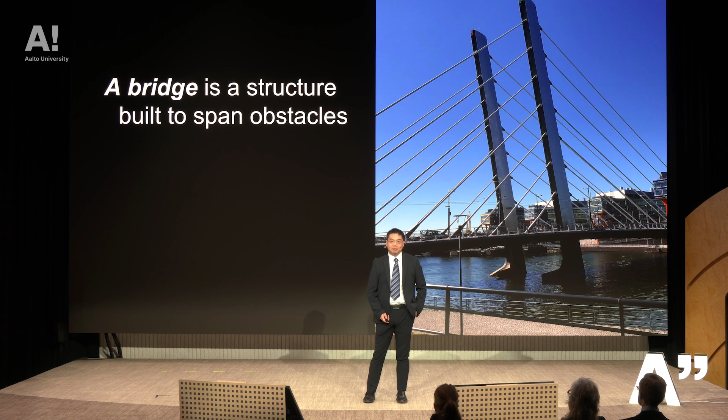But have you ever wondered how many bridges we have here in Finland? In Finland, there are about 15,000 road bridges and more than 2,000 railway bridges. Then what about their service life? Or how many years do we expect them to last? Quite long, actually. Most of them are designed to last for 100 years. Then, how old are they now? Or how long have they already been in service?

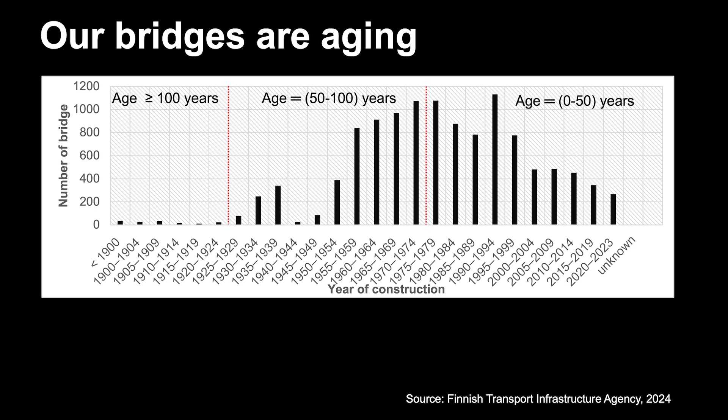This figure shows the distribution of the number of bridges by their year of completion. As you can see, most of these bridges were built after World War II, but over time, the construction of new bridges has slowed down, while the existing ones continue to age.

Now, what about their condition? According to the Finnish Transport Infrastructure Agency, about 5% of road bridges are in poor condition, and the number of such bridges is still slowly increasing. It was also estimated that by 2020, about 7,000 bridges would need renovation.

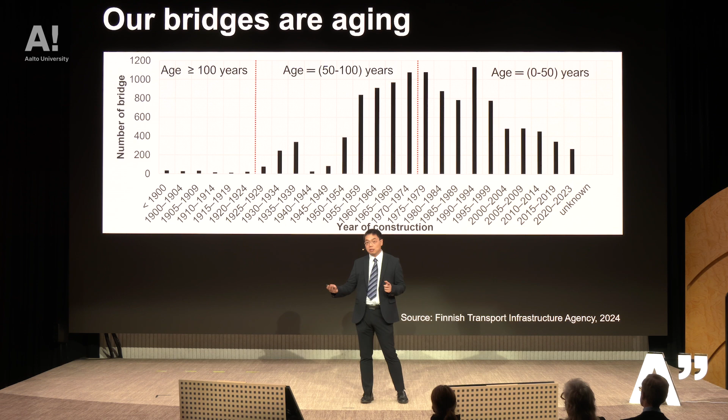So the big question is, what will happen in the next 20 or 30 years? If we look at the current trend, it becomes clear that after another 20 or 30 years, most of the Finnish bridges will be over 50 years old, and some of them will be even over 100 years old. So simply put, our bridges are aging. Actually, this is not just a problem in Finland. It is happening in many other countries as well. So to some extent, it is a global issue.

With this background in mind, let's now turn our attention to future challenges and opportunities in bridge engineering. First, how can we improve the management and maintenance of existing bridge structures? Especially, how can we develop better methods for fast bridge damage detection and also for bridge health assessment? Another question is, how can we improve the bridge robustness for both existing and new bridge structures?

And what about sustainability? As we move toward a greener future, how can bridge engineering contribute to the green transition? While these challenges are ahead of us, they also present many opportunities to find solutions. In my group, we are working on several key research topics, such as structural health monitoring, bridge robustness, and demountable connections.

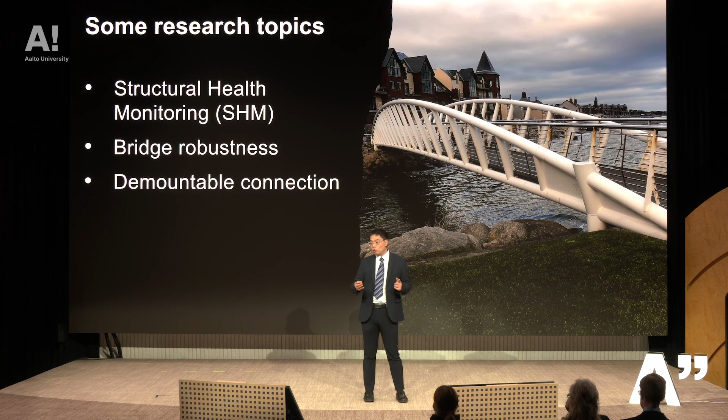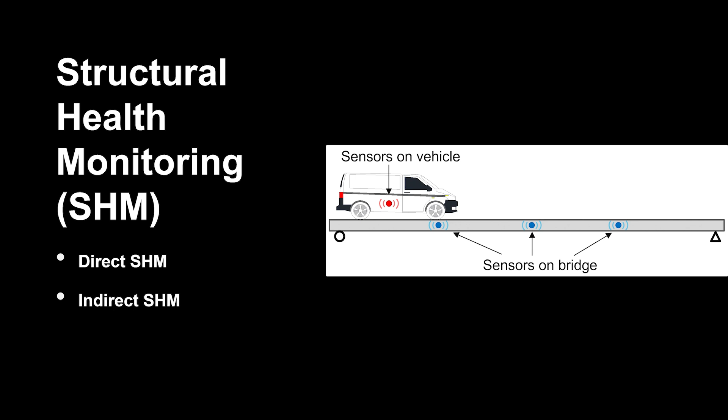Now let's start with the first topic, structural health monitoring. Bridges are designed with a long service life, but over time, bridges or bridge components can experience degradation or damage. While regular inspections are crucial, they may not always detect damage in time. And this is where structural health monitoring systems come into play. These systems can help us to detect the damage at an early stage, allowing us to prepare the repairs more efficiently and avoid costly failures.

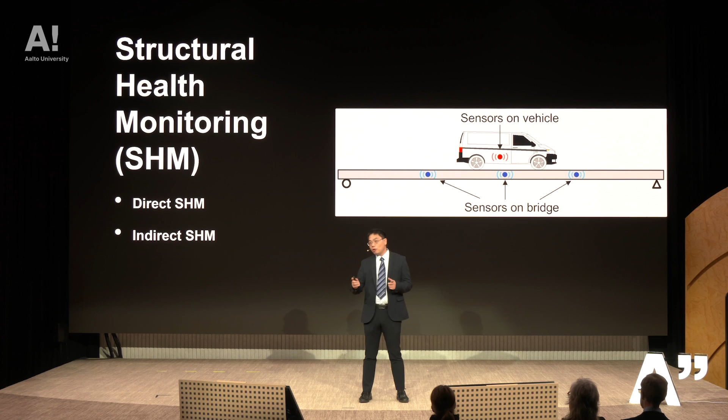Currently, most structural health monitoring systems use the direct method, where sensors are installed directly on bridges. These sensors provide us valuable information and data about the bridge's condition, but since one bridge may require many sensors, this method can be expensive and also time-consuming. As a result, these systems are typically used only for important or long-span bridges, but for short-span or medium-span bridges, structural health monitoring systems are often not implemented.

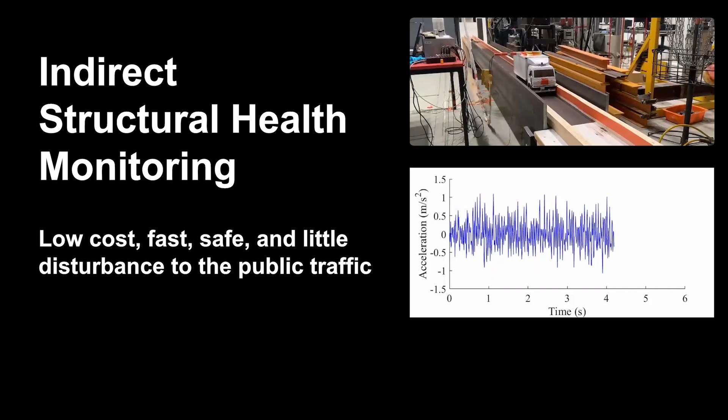To address these challenges, my group is working on developing a vehicle-based bridge damage detection method. In this approach, instead of installing sensors directly on the bridge, we install them on the vehicle. This allows us to collect data indirectly as the vehicles travel across the bridges. Since the same sensors on one vehicle can be used to scan multiple bridges, this method can be cheaper, faster, and safer. It also reduces the traffic disruptions as there is no need to stop or slow down the traffic.

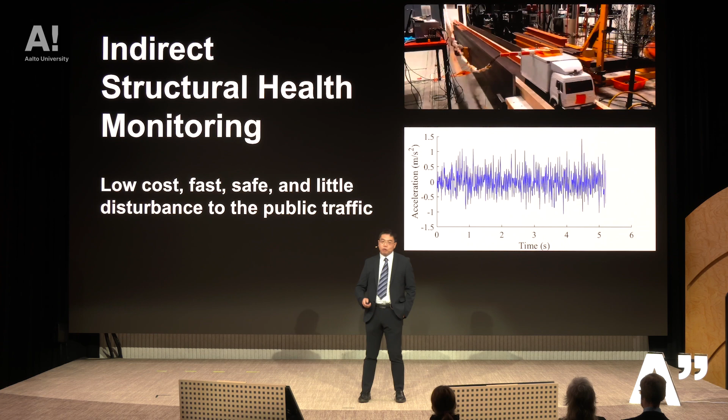In my group, we have performed some lab tests, such as shown here. And also, we have conducted some field tests on 2 temporary bridges in Espoo to further investigate this method. Using the algorithms developed in my group, we can identify the key information of the bridges. For example, their natural frequency, a key indicator of the bridge condition.

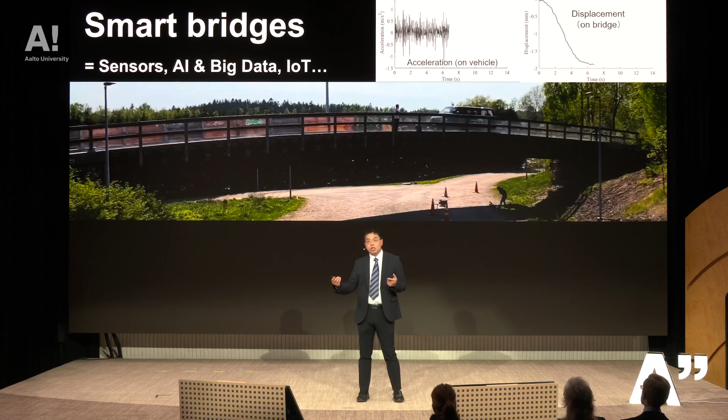While collecting data indirectly offers many benefits, it also presents challenges, for example, in data processing. However, the use of AI and big data showed a great potential in addressing those challenges. Also, my group is collaborating with our partners to explore the possibility of using public transportation, such as buses, to monitor the bridge conditions.

Next, let's talk about bridge robustness. Structural health monitoring systems can help us to detect the damage at the early stage. But beyond that, we also need our bridge to be able to avoid disproportionate consequences in relation to its initial damage. So what does this mean? For example, what will happen if a bridge component fails? Will it lead to the partial or even global collapse of the whole bridge? And would the bridge still function? To answer these questions, we need to examine the bridge robustness.

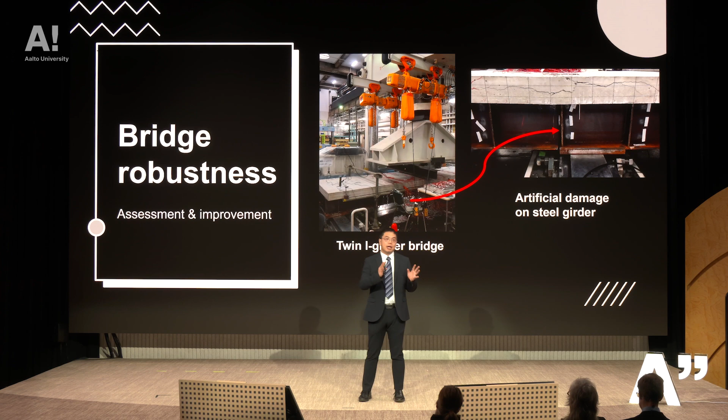In my group, we studied the robustness of some typical bridge structures, such as the twin I-girder bridge shown here. We analyzed the impact of severe artificial damage applied to one of its 2 main girders. We also have one ongoing PhD project focusing on the robustness of truss bridges. Especially, we examine the effects of different damage severity, the load transfer mechanisms, and the role of secondary members in redistributing the load after the fracture of one or more truss members. Our goal is to find effective ways to improve the robustness for both old and new bridge structures.

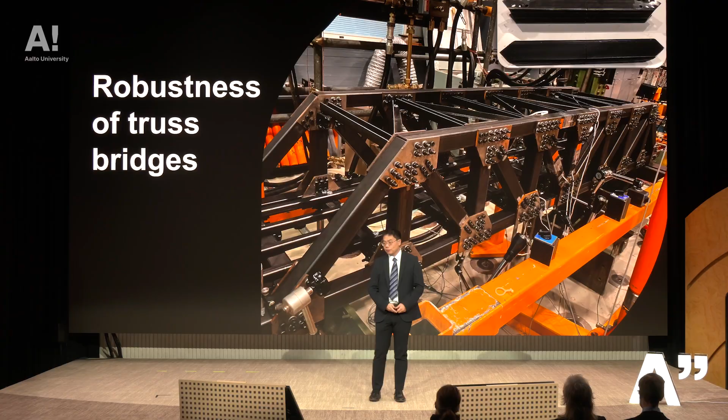So finally, how can bridge engineering contribute to the green transition? The construction sector plays a key role in sustainable development, and bridge engineering is no exception. There are many ways we can contribute. For example, by using structural health monitoring systems, we can enable a wiser use or even a reduced use of construction materials by improving the design. And with the research on bridge robustness, we can improve the long-term safety and reliability of our bridge structures. And all these efforts can also help to extend the service lives of our bridge structures.

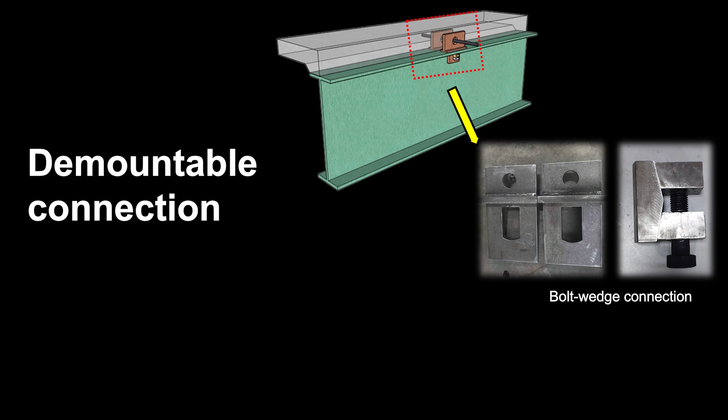Repurposing and reusing structural components at the end of a bridge's life is another way to reduce CO2 emissions. But traditional connection methods make the deconstruction challenging. Therefore, the design of the joints or connections is the key. In my group, we have one ongoing project working on developing different demountable connections. These demountable connections are designed for fast assembly and easy disassembly, and they can bring us many benefits. For example, the use of demountable connections can speed up the construction, enable faster repairs, and also allow for easy deconstruction at the end of the bridge's life.

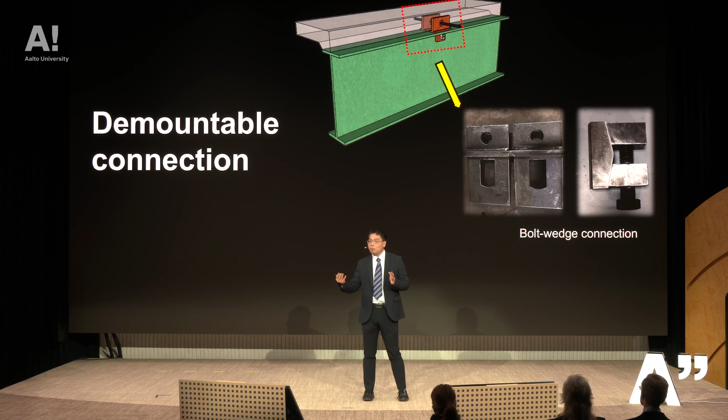However, reusing and repurposing bridge components remains challenging due to concerns about fatigue, damage, and also the difficulties in predicting their residual service life. Still, research like this can open new possibilities for more sustainable bridge designs. To summarize, by addressing the challenges we discussed today and conducting research in these areas, we can work towards making our bridges smarter, more resilient, and more sustainable.